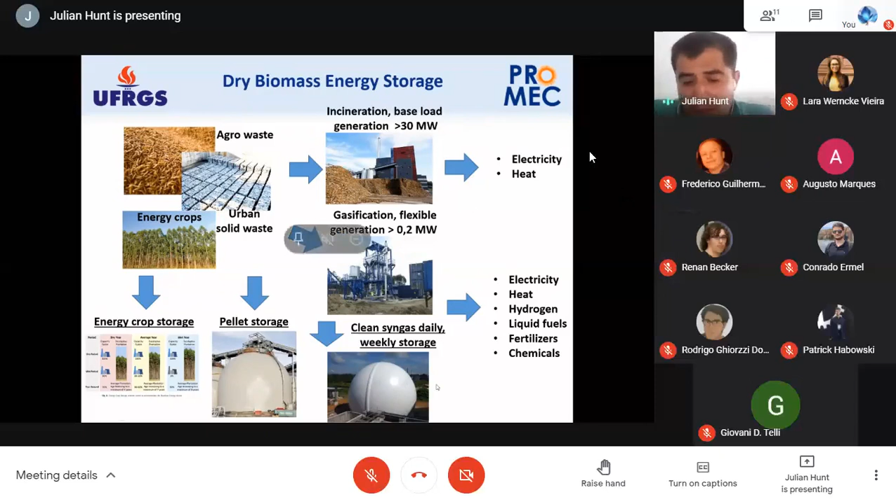and other chemicals. The other advantage of producing syngas is that you can store the syngas for daily and weekly storage, which you cannot do with a biomass plant. A biomass plant is usually a base load solution, so it generates electricity throughout the whole day, throughout a whole month. But with gasification, you transform the biomass into syngas, and then you can store the syngas similarly to biogas or natural gas, and use it for peak generation during moments in the day when electricity is more expensive.

So looking into the resources, when you're extracting and producing wood, for example from a eucalyptus plantation, you have the option to use this resource for wood production for civil construction. You can use the wood for cellulose, for the paper industry. You can use the wood for a biorefinery, which has been developing mainly in Europe. And you can also use the wood from these forest plantations for biofuels.

Mainly the low-grade wood, which is small, irregular, which doesn't have the qualities for sawmills or for paper production or biorefinery, is used for fuel. This mainly happens in the US. In Brazil, it changes because of the location, the distance from a paper industry. Maybe it's too far from the industry, so all the wood goes for incineration. But this would be the ideal way to manage an energy crop. From the same energy crop, you have several products from the wood.

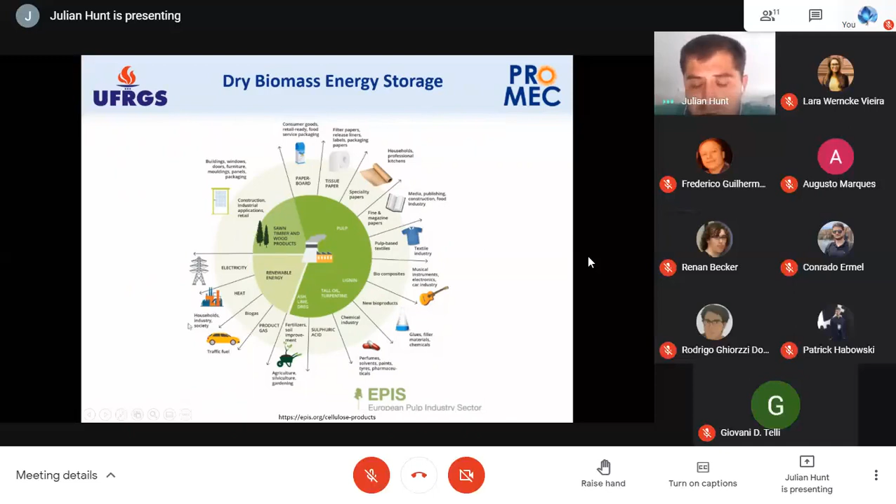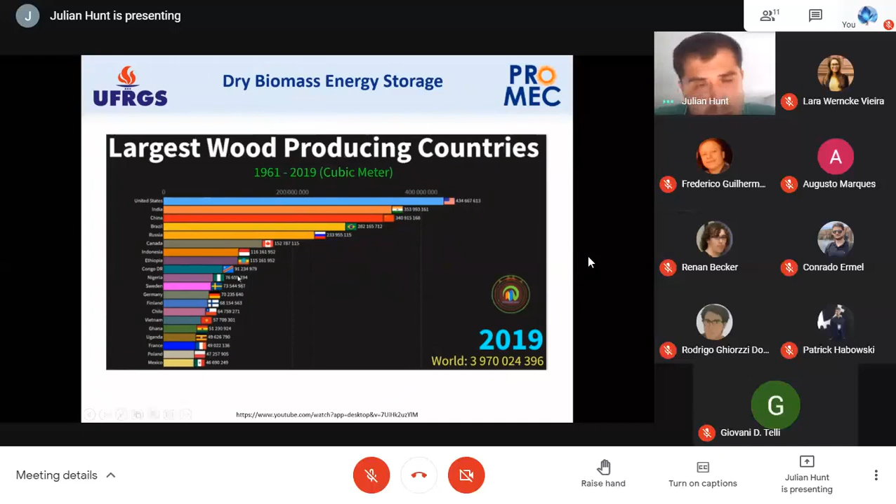In the US, they have around 40% for paper production, another 40% for construction industry, and then 15 to 10% is used for fuel and other industries. The US is the country with the highest wood production, followed by India, China, and then Brazil, Russia, Canada, according to the FAO. FAO is a food regulator. It's an agency from the UN that regulates food products.

In Brazil, we had the production of wood increasing significantly from around 2011 to 2018, for example, mainly due to the increase in exportation and civil construction. But then you have a large decline, and it's a very volatile industry. So the more products you can have from this dry biomass, the better, and one of them is electricity generation.

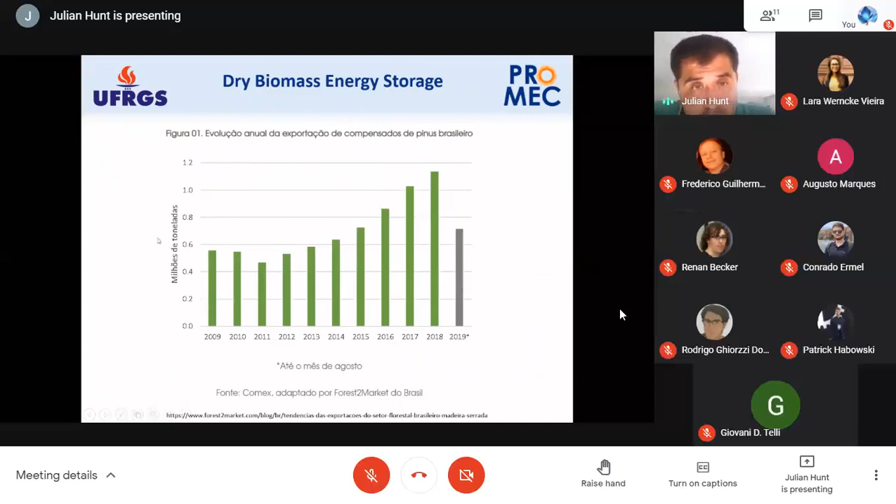So this is the exportation of wood from Brazil, Pinus. The main states for production and exportation of this wood are Santa Catarina, Paraná, then Rio Grande do Sul. And the countries are the US, Mexico, China.

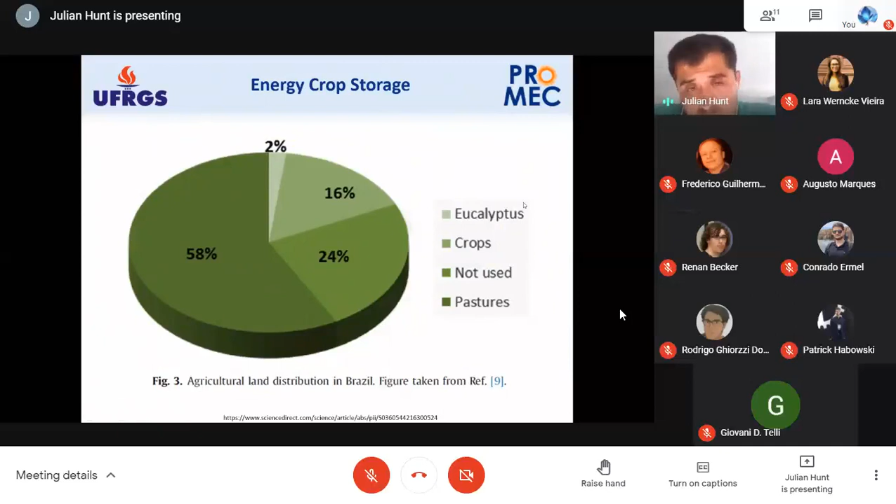And looking at the whole arable land in Brazil, eucalyptus takes around 2% of the land, pasture 58%, crops 16%, and 24% of the arable land is not used so far in Brazil. So there is a lot of land available, for example, to produce biomass for electricity generation, not only for all the other markets that we had talked about.

And this energy crop storage solution, which I propose, is very focused on the Brazilian case, which varies with the amount of hydropower generation that is available in Brazil. For example, in a very wet year, you have a lot of hydropower generation and the cost of electricity reduces, so you don't need so much thermoelectric generation from natural gas, from biomass, from coal.

One alternative would be not to use the biomass that you have available for electricity generation. You would allow it to grow instead of cutting and using it. And then when you have one, two, three, or several dry years, you would increase the amount of biomass consumed, so the average age of your biomass plantation will reduce.

So in a dry year, you have, for example, a 90% capacity factor for your biomass plant. In a wet year, you only use 50%, mainly in the dry season or when the price of electricity is higher, and you allow your biomass energy crop to grow. So this energy crop management alternative is appropriate for Brazil because of this variation in costs throughout the year.

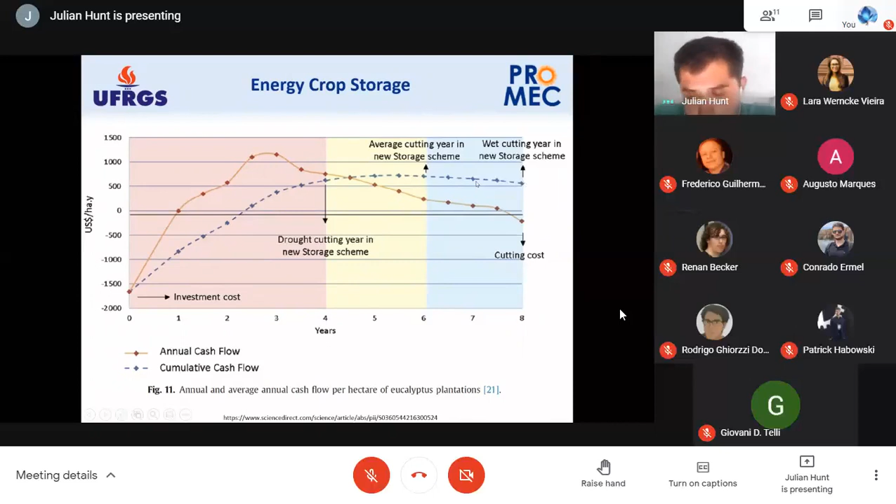And another particular issue for biomass plantations is that the biomass, the eucalyptus, the pinus, has to be planted within around a 50 kilometer radius for you to make incineration, a power plant, viable. For example, with around 20 to 40 megawatts.

You need the area surrounding the plant, at least 2 to 5%, to be biomass plantations in order to make it viable. So below this, you would think about using gasification as a solution. I'm going to talk about gasification in the next slide, not further on.

So another option, which is very used, particularly in the US, in China, in India, in Europe, is the production of wood pellets, and it's also easier for storage. The production of wood pellets, particularly in Brazil, would be interesting because storing wood is very complicated, because the wood degrades and you have a high concentration of humidity. Whenever you want to burn it, you can use it. And it's a challenge because it's going to putrefy.

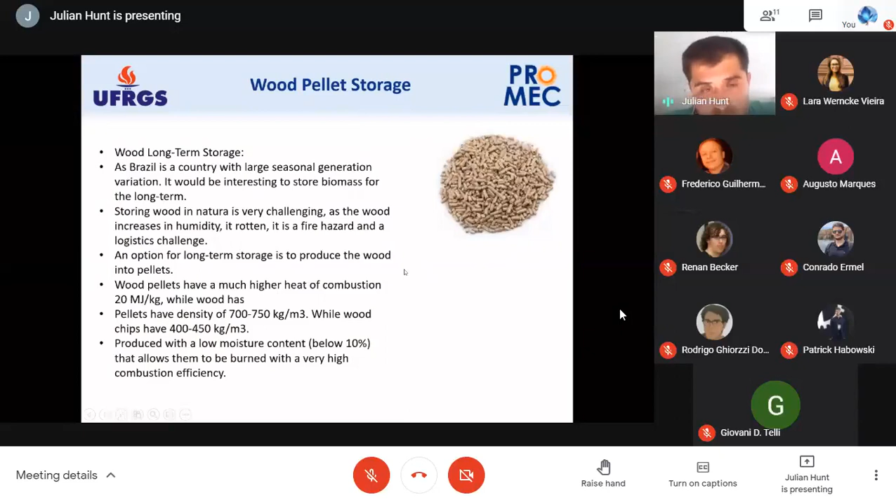It's also used because in Europe, in the US, there are a lot of people that use these wood pellets for heating in their houses, for heating up water, for taking showers and washing. This is also a good approach for decentralized energy supply for heating in countries. It could be used also in Brazil for process heating, for industrial heating, and have several benefits compared with wood chips, which are usually used in Brazil.

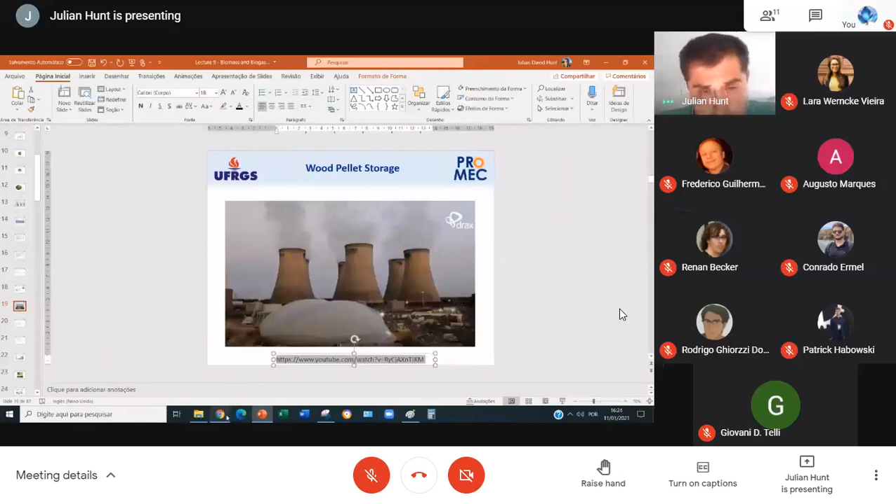So there is one power plant in the UK, which is Drax, which has 2 gigawatts of installed capacity. And I would like you guys to watch this video, and they're gonna show how Drax managed to turn itself into a biomass power plant. So Drax used to be a coal-fired power plant, but the UK and Europe have decided to abolish coal power plants. So they had to make a new design, and this is the solution that they found, and it's a very good solution. And Brazil would also have a huge potential for this technology.

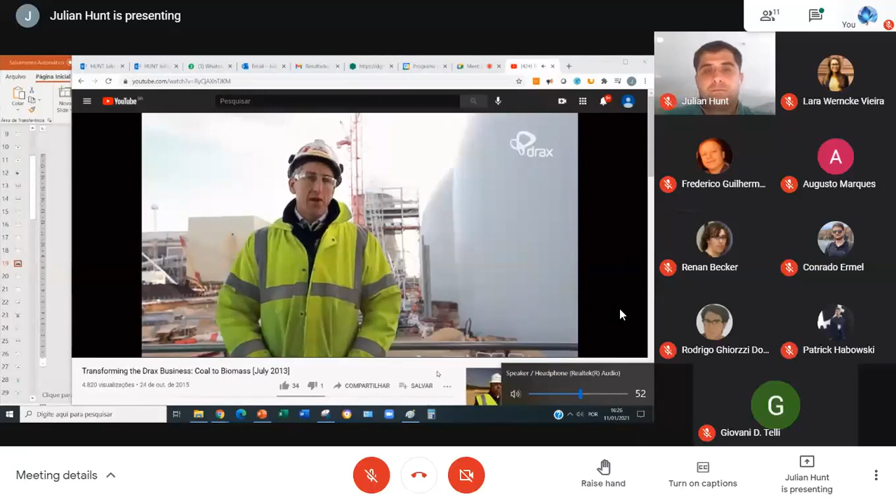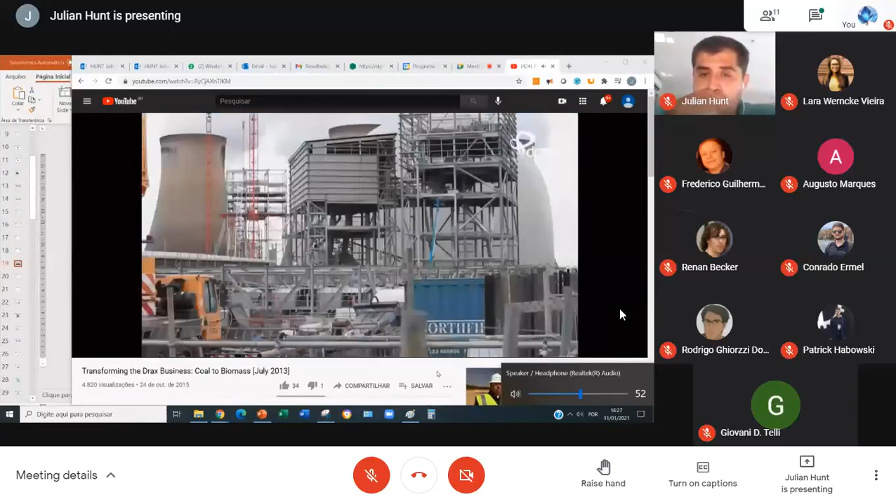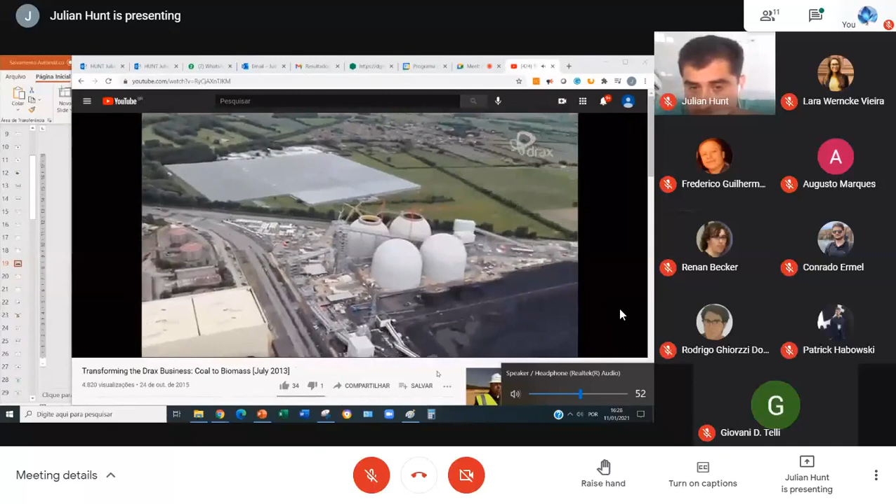Please, can you please put this video on? Thank you. Did you guys finish the video?

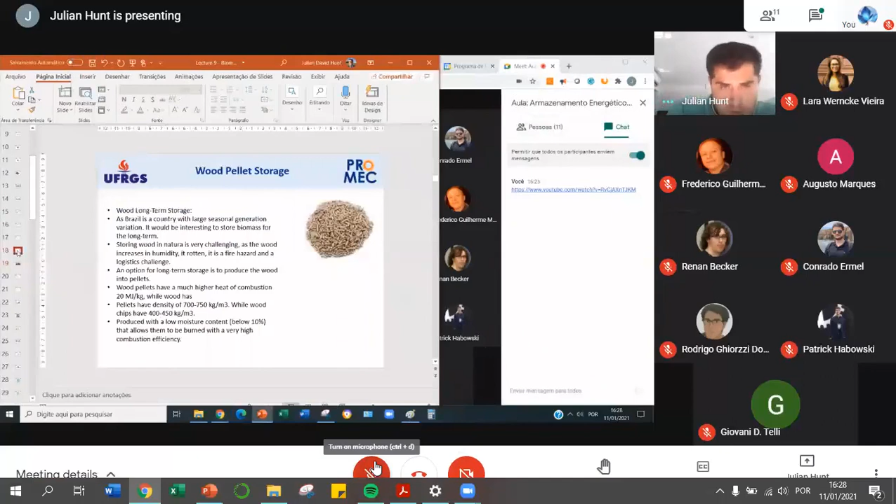Right. So this is the top innovative solution for storage of pellets. Pellets are convenient because they're not like water that increases the pressure on the bottom. Storing these pellets is a huge challenge, of course, but with these domes, the structure, the weight distributes itself, which allows storing in very high, 30, 40 meter domes like this. And they're inflatable, after which the structure is strengthened in order to cope with the weight. But it's a very good approach for storage.

For example, I don't have the picture here, but if you look at the coal storage sites that you need, it's huge, and has a huge fire hazard. It produces a lot of particles around the coal power plants, which is not so great. So having such a solution for biomass would also release a lot of dust in the air. The humidity would increase. You wouldn't be able to use the biomass, the pellets, if it rains, for example, because the amount of water in the pellets would increase, and then the efficiency of the boilers would substantially reduce. This is a very interesting solution.

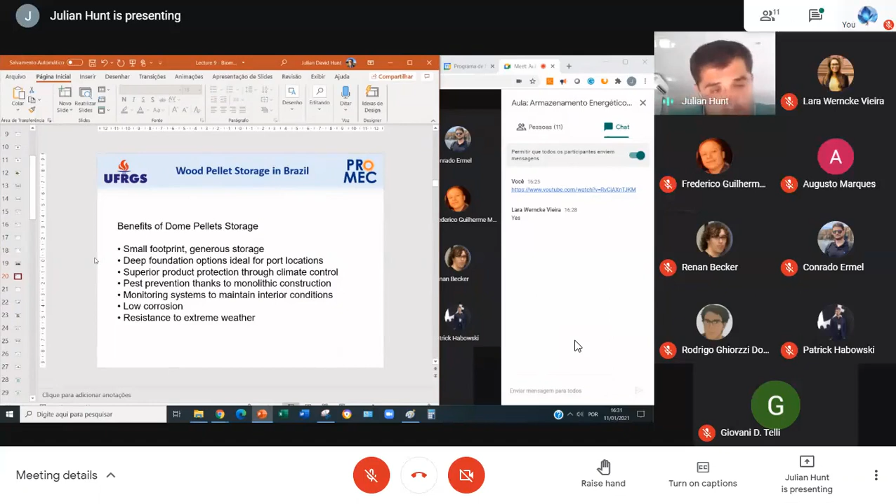And I was looking into comparing how much these domes store. One of these domes stores 90,000 tons of pellets; assuming calorific values of 20 megajoules per kilogram, you would have around 200 gigawatt hours for one of these domes. 200 gigawatt hours is equivalent to 8 gigawatt days, 0.35 gigawatt months. So for example, one of these domes would supply the amount of energy equivalent to a biomass plant of 350 megawatts, which is a reasonable size. It's a large biomass plant.

The one that we watched in the video is 2 gigawatts, but it used to be a coal power plant. They wanted to turn it into a biomass-fired power plant. They built all this infrastructure to import the wood from the US, for example from Texas to Florida. They have several pellet production plants. It is a huge project. It's a lot of wood, and they bring it all from the US and they make it viable. So I'm sure that Brazil can work it out and produce one of these biomass plantations, which won't require bringing it from very far, and it is one alternative for Brazil.

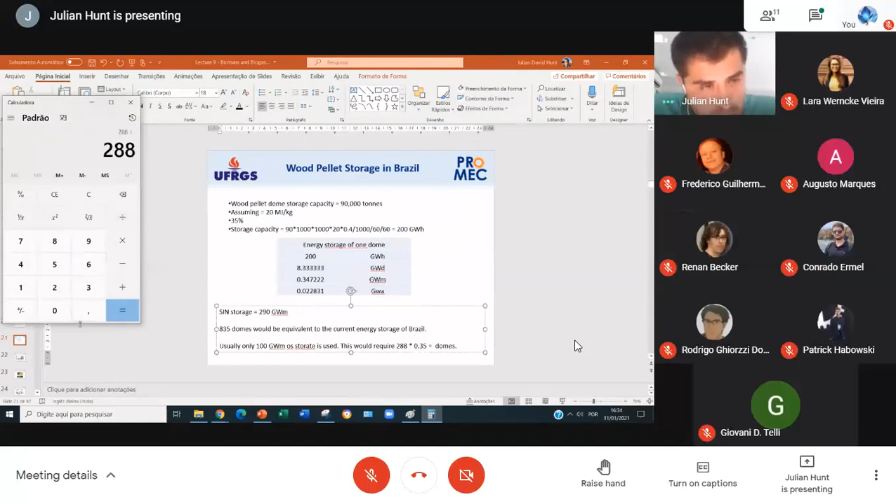Julian? Hello? I have a question. In the case of the England coal power plant, if you have local coal, is it environmentally viable to bring pellets from another continent?

Yeah, usually when you're carrying wood, in order to make it viable, it has to be brought from 50 to 300 kilometers away, because the fuel that you spend carrying the biomass increases the cost a lot. So their solution, they have these pellet plants built close to port facilities, with storage sites in the port facilities, and they try to reduce as much as possible the land transportation.

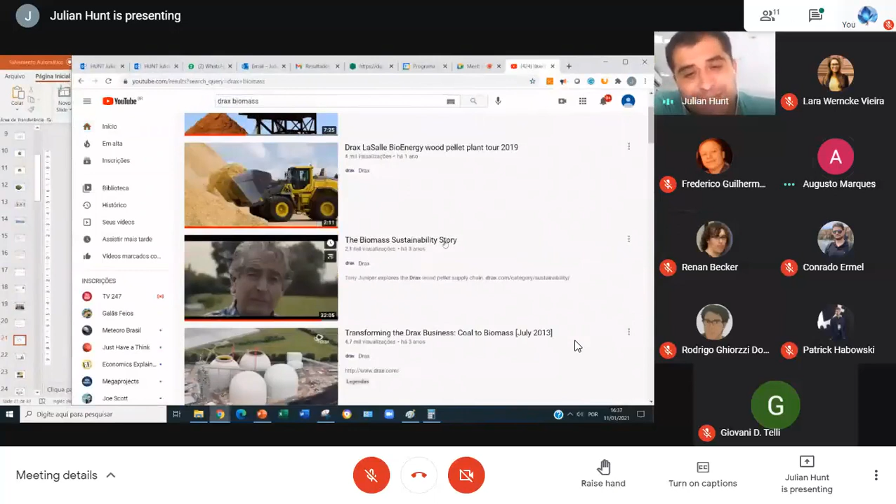There is a video on the sustainability of this solution, which is very interesting. It's half an hour, so I wouldn't want you guys to watch it now because it's a long time. It tries to argue that it's a sustainable solution. I don't really buy it, but they have their arguments in this video. Very good video. You can watch it later.

But it's debatable, of course, because if the ship is propelled with hydrogen, and the hydrogen is produced from renewable energy sources, green hydrogen, then you wouldn't have any CO2 emissions involved. Maybe on the production of the components of the ship and other indirect emissions, but then the sustainability factor would definitely increase,

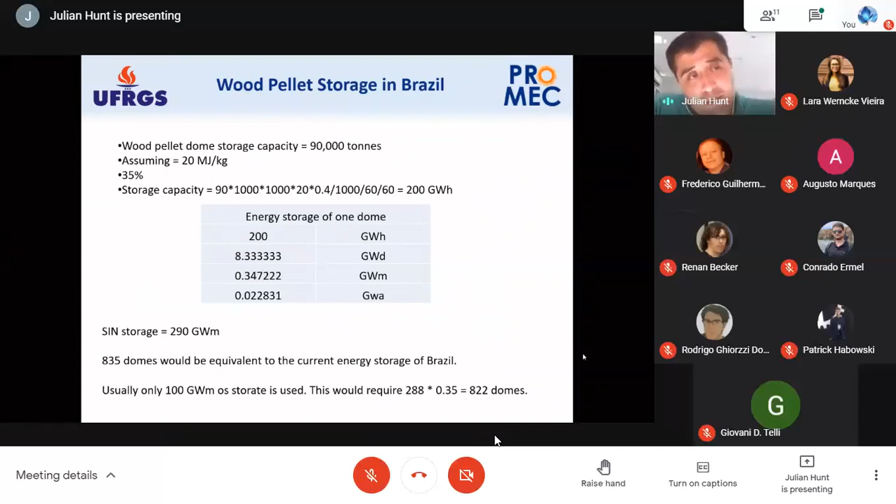but it's still debatable to burn biomass from the US in the UK and argue its sustainability. So it's a very debatable topic. Very good question. In Brazil, it would be much more sustainable if you produce the biomass in Brazil and use it in Brazil. So it's an option that we could consider. Thanks for the question.

Right, so pellets from sugarcane bagasse. There is a possibility, and people are selling this and testing to see if it works. With bagasse, they have to dry the biomass first, then they shred it, and then they pressurize it at high temperatures, and then they produce these pellets. The energy consumption for this process is usually 10%, 15% of the energy within the biomass.

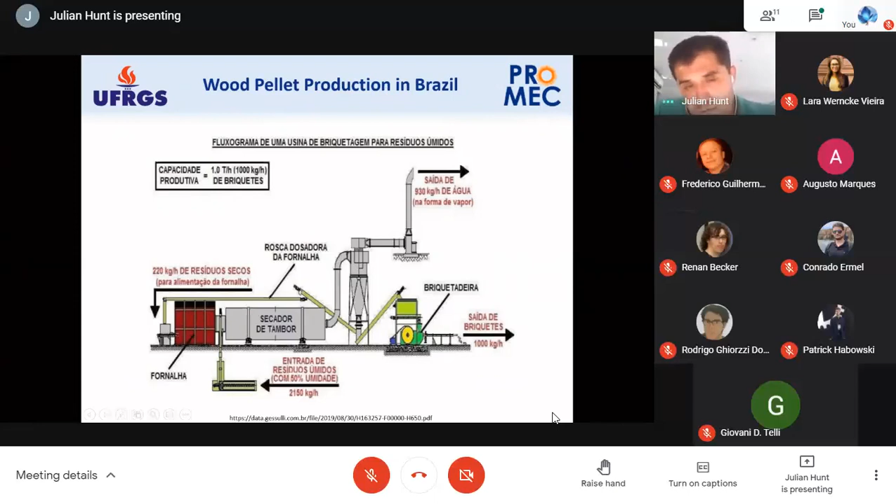So it's a relatively high energy consumption process, but once you have the pellets and you want to generate electricity, the efficiency might increase from 25% to 40% because of the increase in calorific value and the higher heat-to-volume ratio.

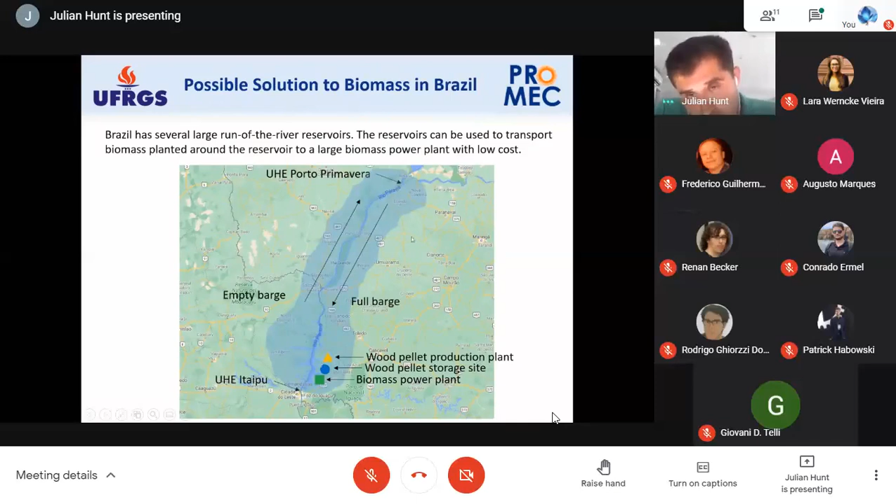So my proposal for a 2 gigawatt biomass plant in Brazil would be somewhere around the reservoir of Itaipu. Then you can bring the wood from upstream. This hydropower plant, Porto Primavera, has locks, so you can transport wood. And this one also, Ilha Solteira, has locks. You can bring the wood that's produced here all the way down using the flow of the river, and then go back. So that reduces the cost of transportation.

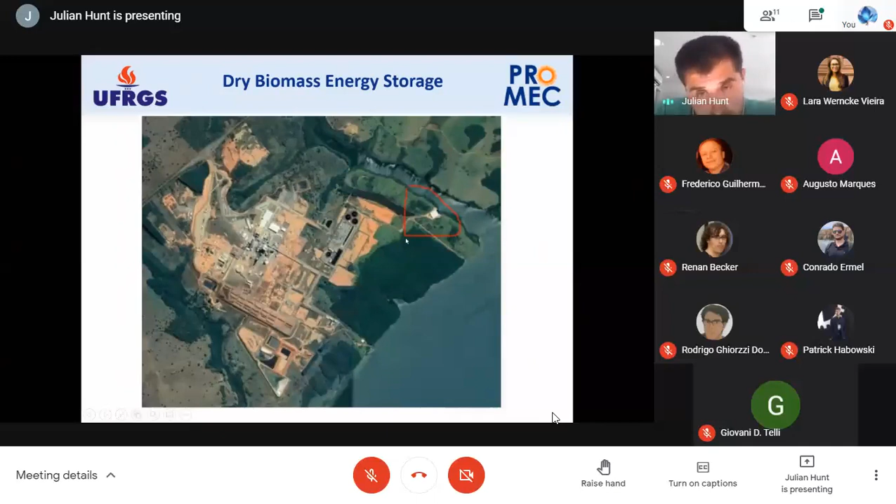So I was looking at the Eldorado plant in Três Lagoas. They have a port here. Look, this is the size of the truck. Look at the size of the ship. So they have two ports for ships in order to transport the wood. A very interesting strategy that can also be used. And I found out also that Eldorado has its own biomass power plant. It's a 50 megawatt power plant. It's called Onça Pintada. It was finished this year,

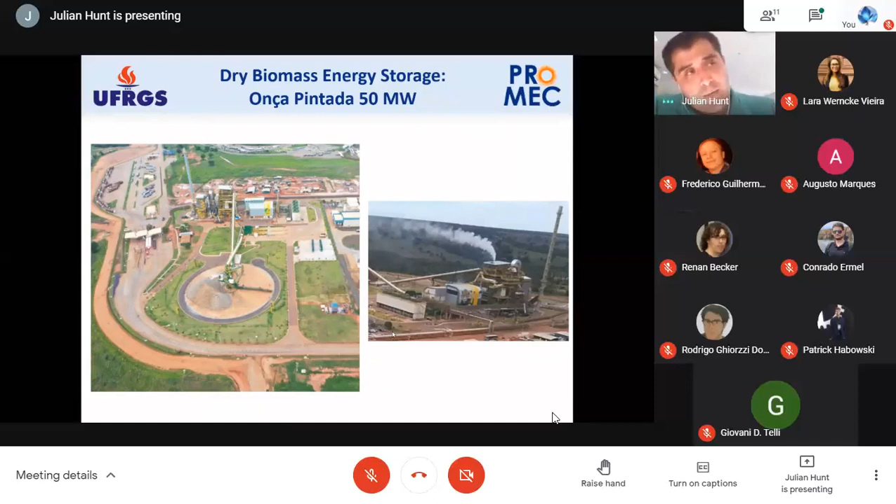and it uses eucalyptus. So if the price of paper increases, they reduce the amount of wood that they burn to produce electricity. If the price of paper drops, they burn more to produce electricity. Maybe the cost of electricity is very high, which makes it more sensible to import paper or reduce exports and use the wood for electricity generation. So biomass is very interesting for having several products. If all of them are cheap, or if electricity is very expensive, you burn the biomass and reduce the other products. Any questions about generation?

This is incineration. No questions, so let's go to biomass gasification. Let's watch another video, because it's much better to watch a video to explain how gasification works.

So gasification, you get biomass and you produce syngas, which is mainly carbon monoxide, 30 to 60% of carbon monoxide, which is CO. It's not CO2, it's CO, so it still has some calorific value, and 25 to 30% of hydrogen, which is great nowadays because everyone's talking about hydrogen. Wasn't great in the past, but now it's becoming very fashionable. Hydrogen. Shall we watch?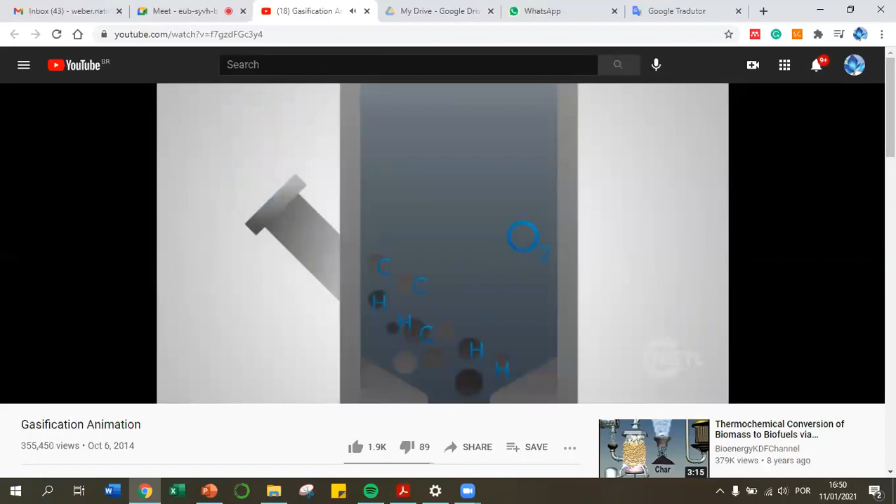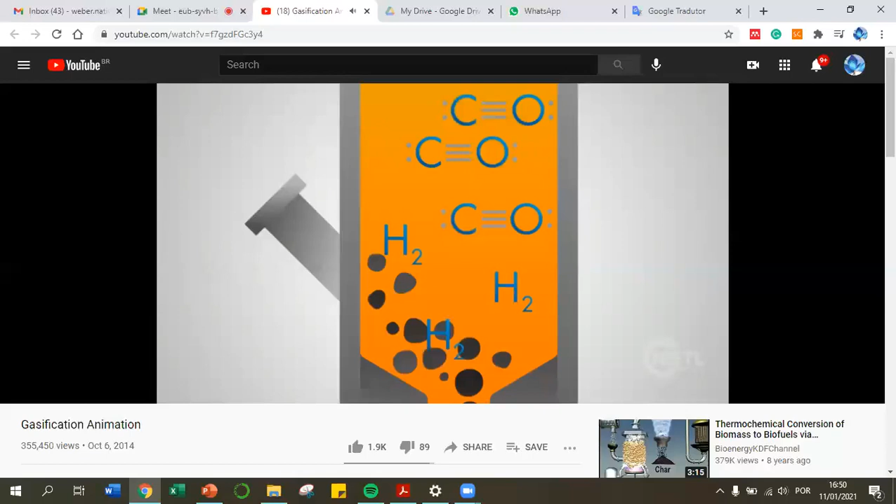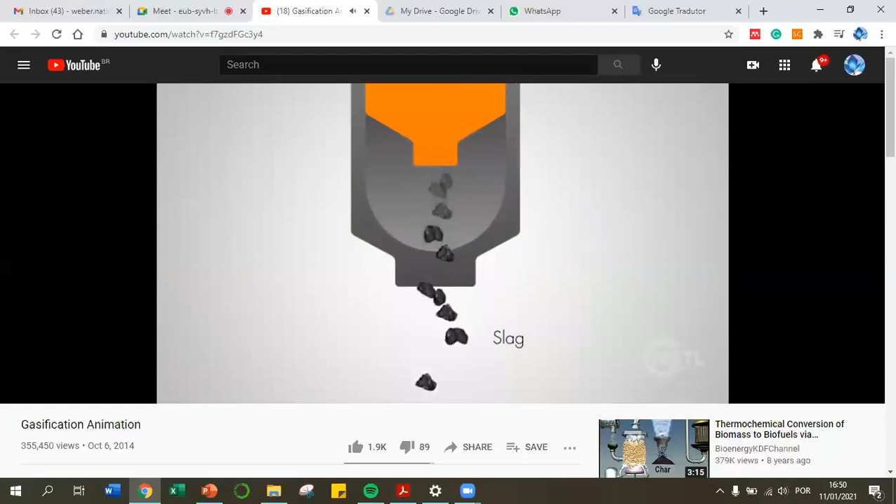Less air is provided than for combustion, and water is added as steam. Oxygen chemically reacts with the carbon in the coal to become carbon monoxide. The hydrogen atoms in coal become hydrogen gas molecules. The water also provides oxygen to chemically react with carbon, leaving hydrogen behind. These chemical reactions give off heat, but less than if the coal were completely burned. The product of gasification is syngas, which is primarily carbon monoxide and hydrogen molecules. The sulfur in coal becomes hydrogen sulfide, which is separated from the syngas and is used to make sulfuric acid, which is then sold. Due to the high temperature inside the gasifier, slag is made instead of ash. Slag is like small rocks, and contaminants remain safely trapped inside, so slag can be used to make roads.

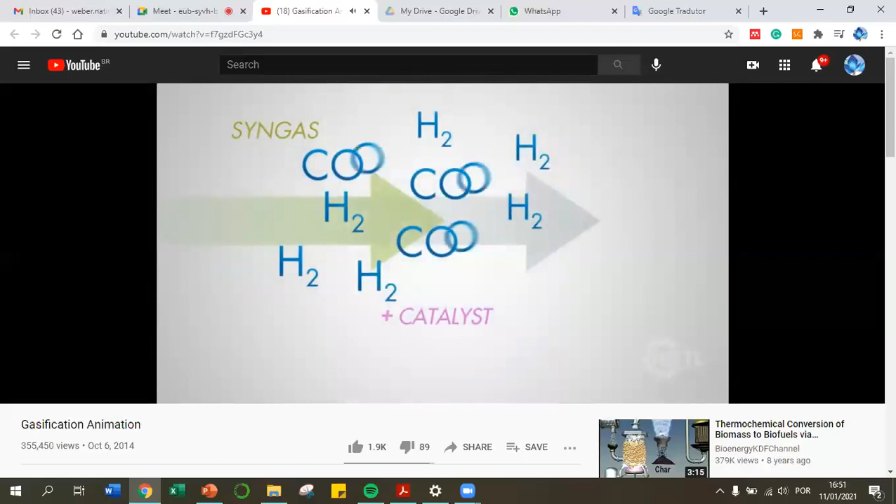Whereas gasification breaks coal down into small building blocks, other processes not covered here will reassemble these molecular building blocks, hydrogen and carbon monoxide, into all of these valuable products. To make clean energy from coal, we need hydrogen. To make more hydrogen, the water-gas shift reaction can be used to exchange each carbon monoxide molecule for a hydrogen molecule. When syngas is combined with steam and a catalyst, the water molecule gives off its oxygen atom to the carbon monoxide, turning carbon monoxide into carbon dioxide. Catalysts are used to increase the speed of chemical reactions. DOE's vision is to use hydrogen to generate electricity in a power plant with only water going up the stack.

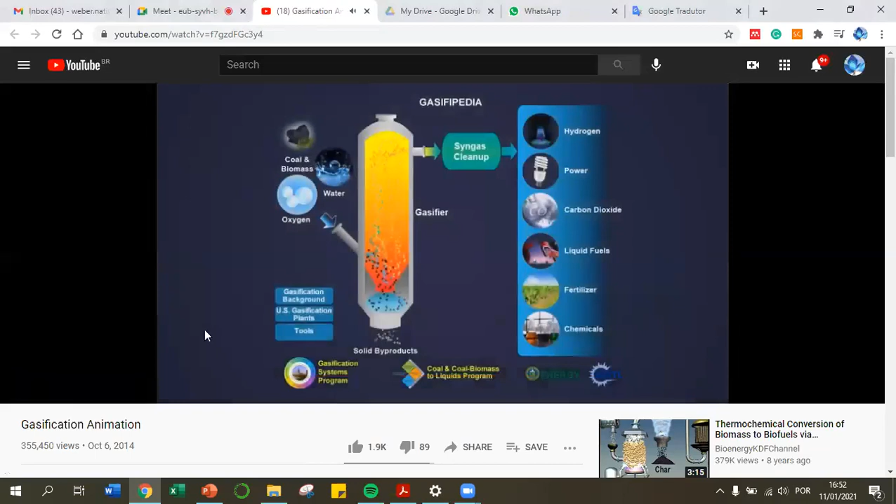Coal can indeed be used to make clean electricity. But gasification is not limited to coal. Wood, natural gas, oil, and farm waste can all be burned to make heat. They can also be gasified to make clean electricity, clothing, fuel for cars, trucks, tanks and jets, and other products we use every day. Clean coal gasification can be done today. DOE is developing technologies to make this vision affordable. To learn more about these technologies and gasification in general, enter Gasifipedia into your preferred search engine.

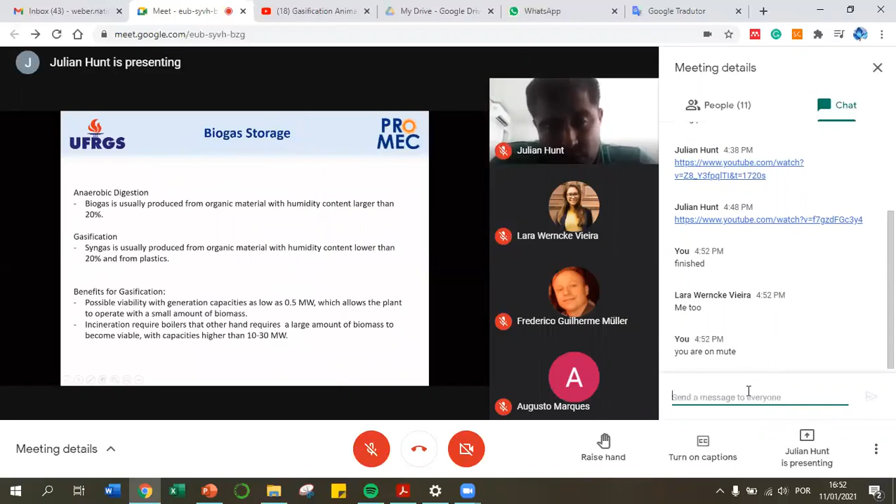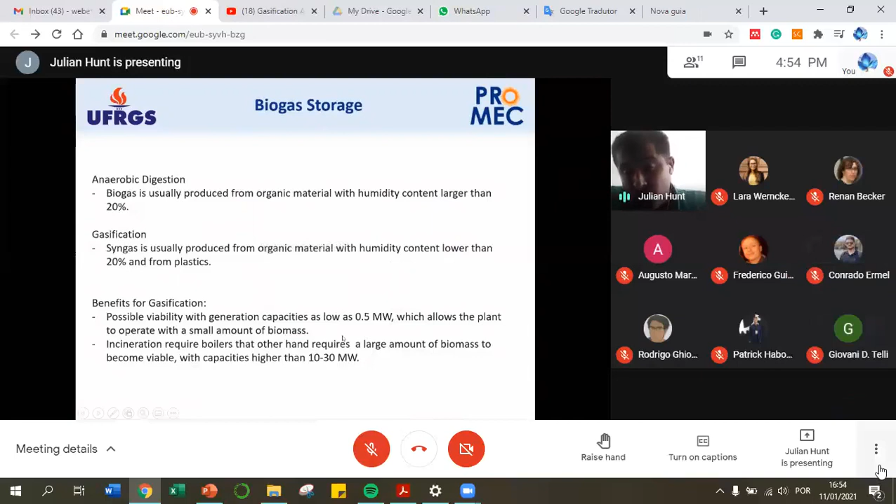So benefits of gasification: it can produce viably generation capacities as low as 0.5 megawatts, which allows a plant to operate with small amounts of biomass. So the main benefit nowadays is that you can generate electricity with very small amounts of biomass. Incineration, on the other hand, needs a very large boiler, very large plants, which need a large volume of biomass. So now the benefit is that it operates with small amounts of biomass. The other benefit, as I said, is producing hydrogen. Hydrogen is also going to be very important in the future.

One particularly interesting project you could publish or develop is that gasifiers are small and light, so you can put the equipment into a container. Instead of transporting biomass to the gasifier, you take the gasifier to the source, for example a rice husk plant. You would need a substation to sell electricity to the grid or use it in your plant, so it would be interesting to pair this infrastructure with a solar power plant, because the substation you already have gives you the electric system required to connect your biomass gasification plant to the grid. This is around 10-15% of the project cost.

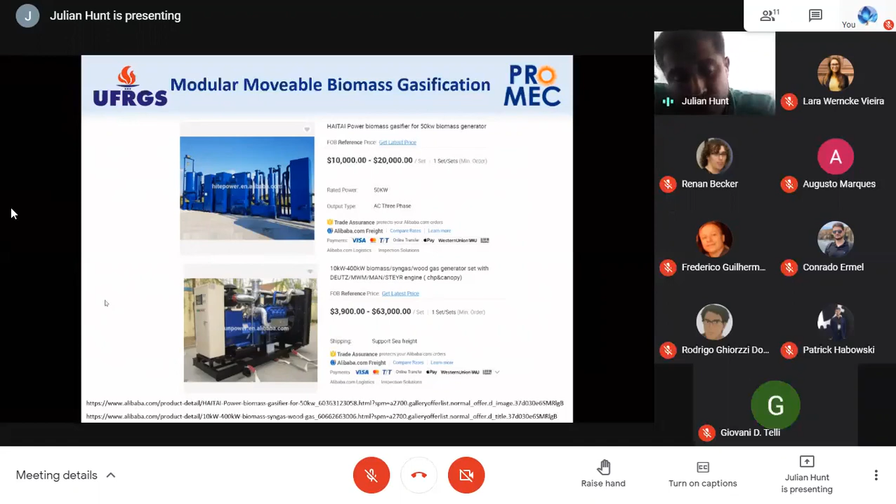So the idea is you put this in a container. For example, for one month you go to a plant that has stored rice husk or other waste material. You store it in a container, a storage facility, and consume all the biomass. When it's finished, when you don't have enough, you put the container back on a truck and take it to another location. This is an interesting strategy to make gasification viable with a low amount of production, a facility with very small production where you can store biomass and burn it whenever these gasifiers are available around.

A huge benefit of this type of solution, gasification, biogas, or any other solution treating urban waste, is that you prevent the production of methane from waste. If you leave waste in landfills, it biodegrades, and this biodegradation produces methane, which has a much higher capacity for increasing the temperature of the world. It's a much stronger greenhouse gas than CO2, about 20 times more potent.

Instead of having waste degrade, if you gasify it, produce biogas, or incinerate it, that saves a lot of CO2 and methane emissions. If you're clever enough, you can design a project that takes this into account and get more carbon credits out of it. Instead of reducing just CO2, you have a potential 20 times higher than CO2 for greenhouse emissions, making the project viable and earning a lot of money from the carbon mechanism, CDMs I believe it's called. There are a lot of people paying money for you to reduce CO2 and methane emissions.

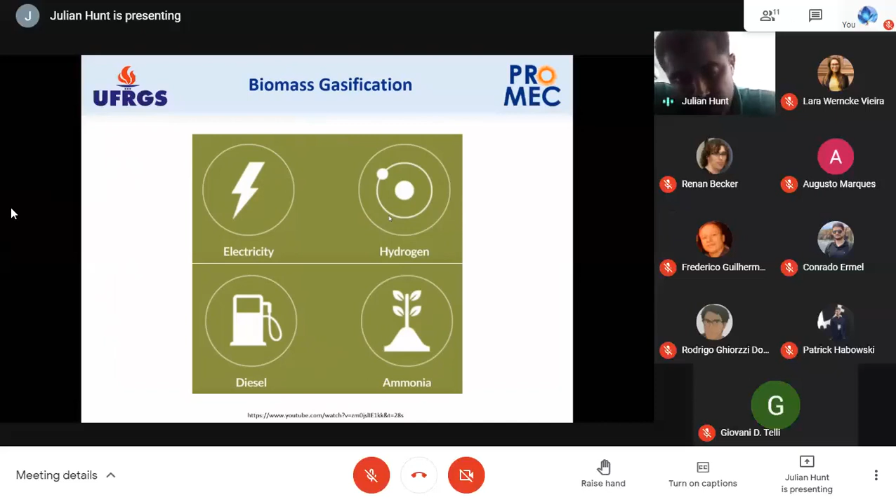As the video showed, you can produce electricity, hydrogen, diesel. You could also produce ammonia, for example, if you have difficulties transporting hydrogen. If you want to produce hydrogen and reduce dangerous carbon monoxide emissions, you have the water gas shift stage, which transforms carbon monoxide into hydrogen. If you only want to generate electricity, you can burn the carbon monoxide without converting it to hydrogen, which is much cheaper and more convenient. But if you want to produce only hydrogen, it's worth converting the carbon monoxide into hydrogen.

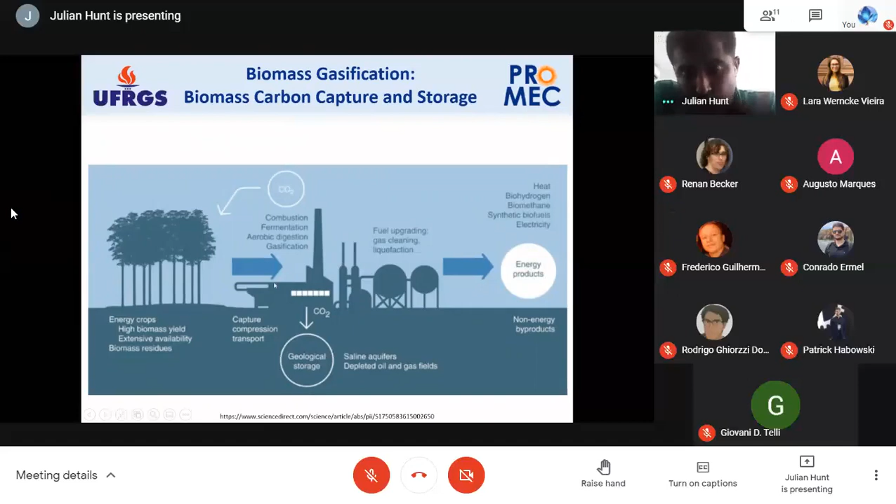As I mentioned, this is a very good approach for carbon capture and storage, because you end up with hydrogen and carbon dioxide, which have significantly different sizes and are easy to separate. Once separated, you can store the carbon dioxide in geological formations under the power plants or any other type of long-term carbon storage.

So now looking at wet biomass, we are one hour in. Any questions about dry biomass?

Hi, Professor, can you hear me?

Yeah, I've been reading during the vacation about town gas. It's very similar to syngas, which they had in England, only from coal. Because of the CO, they decided to prohibit it in England, because people used to commit suicide using it. For example, if you had this gas in your apartment, people used to commit suicide because of the CO. So I believe this gas will never be available for people, just for industries. Thanks, Frederico, for sharing your experience.

In Rio de Janeiro, we also had the gasômetro, which used to gasify coal to produce syngas, and people in Brazil used to use syngas for cooking fuel and boilers. And it's not only suicide - for example, if you forget your gas oven on at night and it's not firing, a kid goes and turns it on, he also kills everyone in the apartment. So it's very, very dangerous.

And in Europe, actually, even natural gas - they are banning it because houses in Europe are completely sealed. They have these double glazed windows that close. And if you forget the natural gas on, or forget the oven on with fire, it consumes all the oxygen in the building.

This actually happened with me and Paula. One day we were living in Vienna - thank God our windows were not extremely sealed - and we forgot the oven on. In the morning she tried to light a candle to pray, and the candle didn't fire well - the flame was very small because all the oxygen in the apartment was consumed. I woke up with a huge headache. I could have died also.

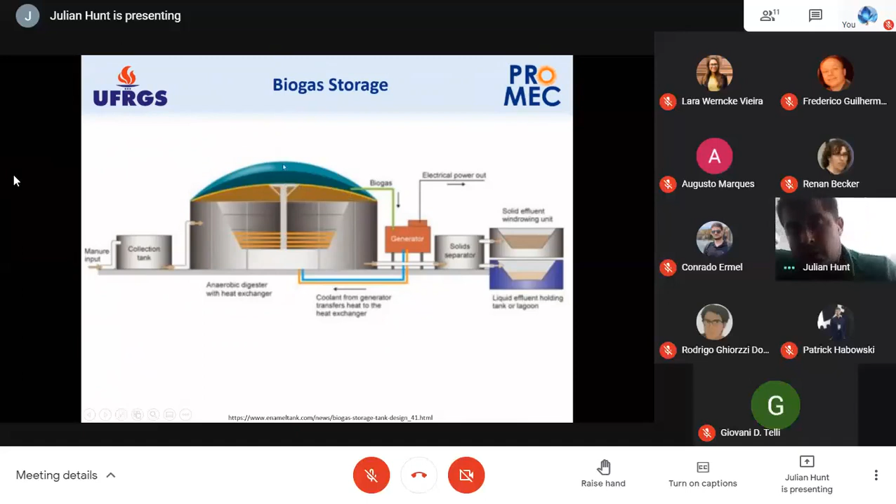This other section of the biodigester is a storage part. During the day, when it's warmer, solar radiation increases the temperature of the biodigester and you produce more biogas. The gas inside also increases in temperature, which increases volume, so this membrane varies, increasing and reducing. This top part is just air - outside air blown in with an air pump, which makes sure the pressure here is slightly, maybe 0.2 bar, higher than the pressure outside. The pressure here increases because biogas is produced and this inner membrane rises. This is how a biodigester works.

This is another example of a biodigester. This one has a stirring capacity, so you use energy to stir the organic compound flowing around here, which increases the production of biogas. You have different other stirring mechanisms - this is a valve, uma hélice, which turns the material in here to increase it.

In the same case, this is the lowest level - if the membrane lowers down and reaches here, the biodigester storage capacity is empty. When it rises, it's filling up. In the biodigester, it's important to have storage because in most cases you want a constant amount of biogas production. Sometimes you produce more, sometimes less, depending on temperature and the concentration of material in your bioreactor. If biogas production starts to lower, you can increase the temperature, or put in material with more calorific value, producing more biomass, and control the amount of biogas production.

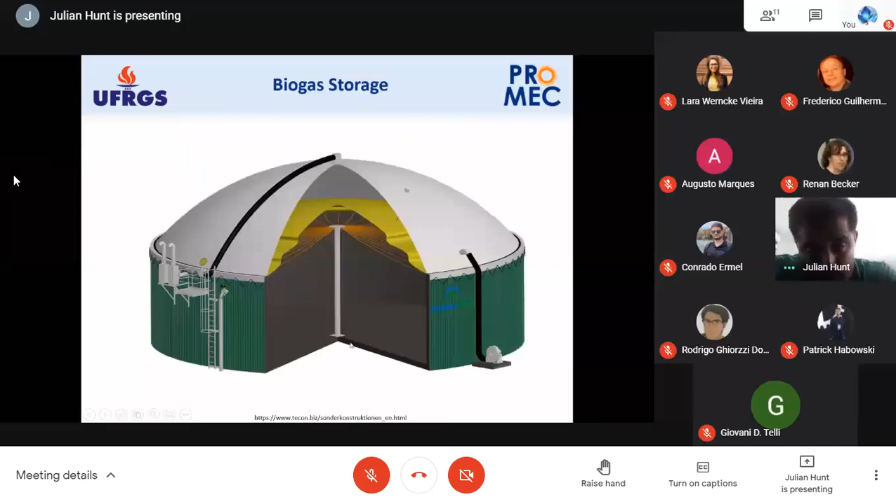Another benefit of this type of plant, particularly in Europe, is that the air in this membrane also contributes to reduce the heat losses. It's like an insulator, because the air inside here is sealed between the two membranes, the outside membrane and the inner membrane, and reduces the energy losses for the biogas reactor.

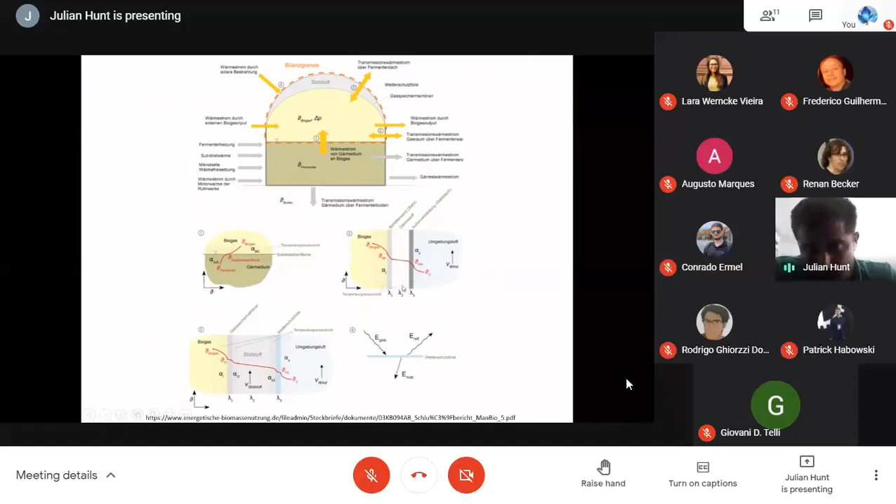I don't know how to read in German, but I can understand some of the concepts here.

Biogas storage. So after you produce in your bioreactor, you can have a facility that only stores the biogas. So it's not the bioreactor. You produce the biogas, you remove the hydrogen sulfide, then you store the biogas or the biomethane in one of these domes. It has a similar mechanism. So basically, you have an air pump that makes sure that the pressure of this membrane is always 0.2 bar higher than the atmosphere, so it's standing all there.

And this inner membrane, so this is the outside membrane, the inner membrane will vary according to the amount of biogas inside. And the pressure is pretty much the same as atmospheric pressure, maybe 0.1, 0.2 bar higher. So in order to store a lot of biogas, these domes have to be very large, huge. So when I talk about balloons transporting hydrogen, it starts to make sense because it's pretty much the same concept, but you leave the balloon to fly and collect it in another location.

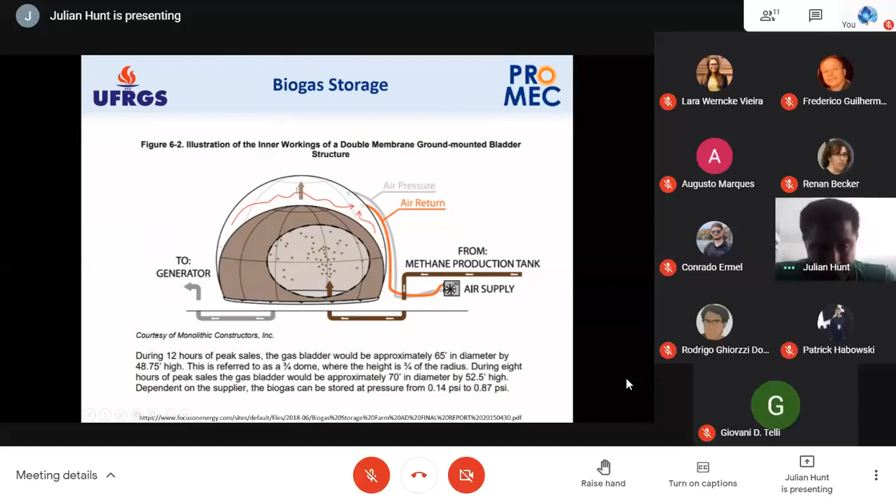So this is another representation. You have the air here, pressurizing this. When you increase the amount of methane, you have to remove the air from this section between the outside membrane and the inside membrane. The total volume is constant. So if you put gas in, you have to take air out. Biogas in this inner membrane, you have to take air out from between both. It's very straightforward, but very interesting though. So this is a kind of balloon material, very resistant and a cheap approach for biogas storage.

For example, if you have one plant that produces electricity constantly, 24 hours a day, you would need a 600 kilowatt generator. You might need a little bit of storage just to make sure that you always have biogas to produce as base load. But if you want to generate during peak hours, when the cost of electricity is higher, you will need more generation capacity because you will burn more gas in a shorter amount of time. And you also need to add storage. The amount of gas that you have to store increases.

This type of solution is good for daily or weekly energy storage, biogas for production of electricity, or for example, delivery of biomethane if you have a station that produces biomethane. So there are different options for storing biogas. You can store in this double membrane storage type, which I just talked to you about.

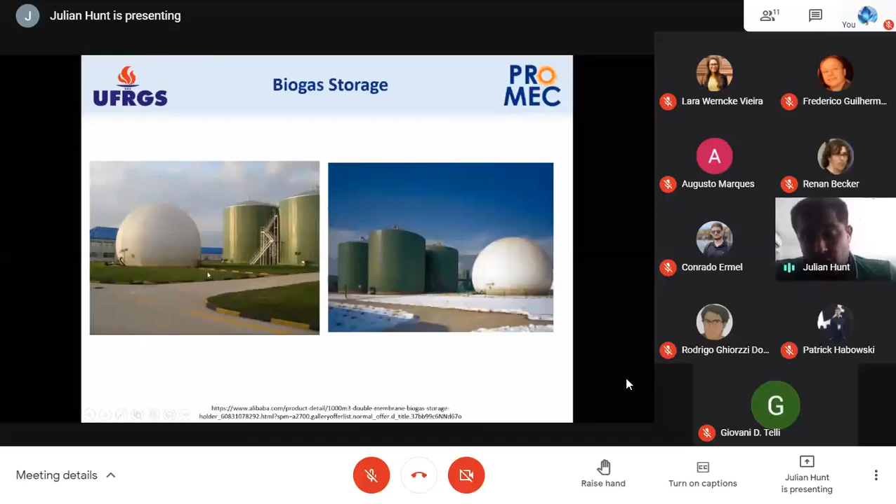So the pressure is much higher. You need much less volume, much less material to store the same amount of gas. But the advantage of the double membrane is that you don't need to increase the pressure of the gas. You can store it at low pressure, at ambient pressure.

So comparing the price for this energy storage solution, as I have been doing in all the lectures, you have two options: a small storage facility with 50 cubic meters, or the largest one available from Alibaba, which is 20,000 cubic meters. And the height goes up to 25 meters, very high. These are the materials that the outside and inside membranes are made of.

So the heat content of biogas is around 21 megajoules per meter cubic, which is equivalent to 5.8 kilowatt hours per meter cubic. And then if you multiply by the volume, you have the investment cost of $2.9 per kilowatt hour storage. Compared with batteries, it is $200 per kilowatt hour. So it's around 70 times cheaper to store biogas than store electricity in batteries.

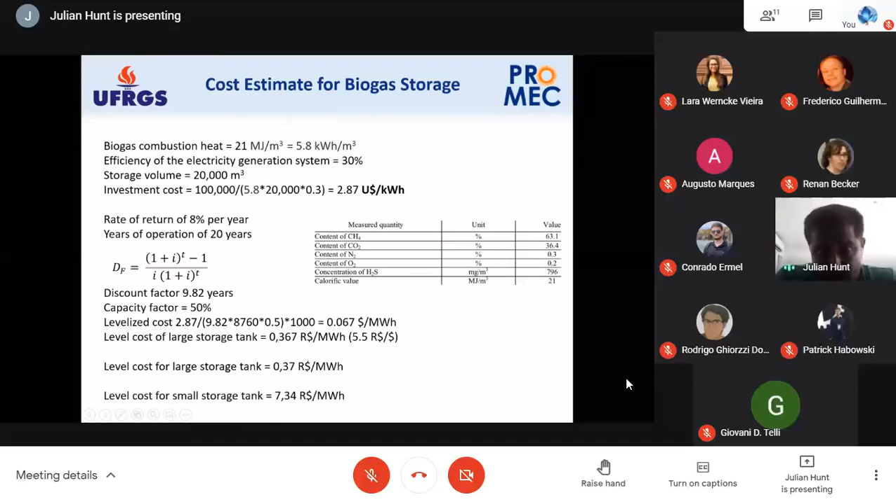So as I mentioned, you can also store gas in high pressure tanks. These pressure tanks can go up to 250 bar. I gave you the example for the power plant in Cuiabá, that's 80 bar. So for example, you have one of these tanks which can store 150 bar, but you only use 80 bar, so you're not using all the potential of these storage tanks. But anyway, the cost is very cheap because you need an 80 times smaller volume to store the same amount of gas because it's pressurized.

And then the cost is much lower than the cost of biogas storage: 0.3 versus 0.02 for high pressure. So it's more than 10 times cheaper to store high pressure gas than low pressure biogas. This is why it makes sense that the US has several of these high pressure natural gas tanks for seasonal storage. You're not storing gas for a day, you're storing gas for 365 days. It has to be 365 times cheaper than storing electricity for one day.

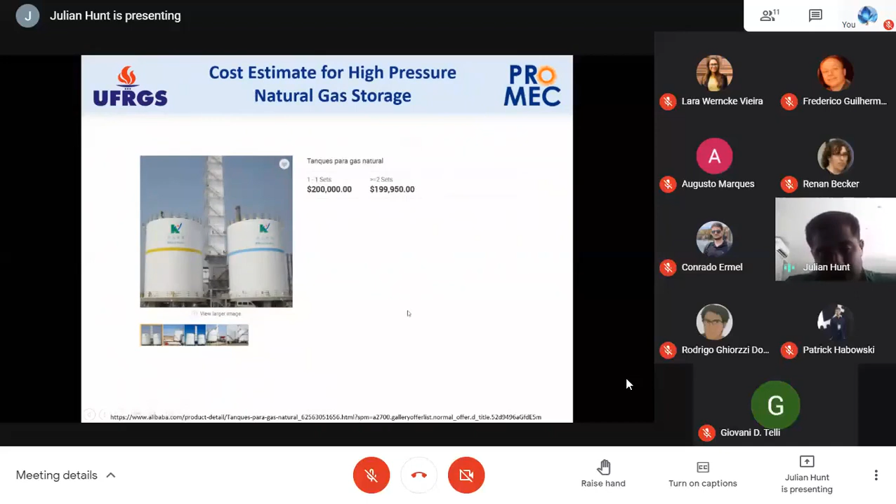So you have a lot of these natural gas storage tanks around China. Even in ports in Brazil, where you have regasification plants, you have natural gas storage tanks. And they are very cheap. Any questions about wet biomass? We have half an hour.

Okay, so we're going to talk about the ethanol energy storage opportunity. Ethanol is mainly made from sugarcane in Brazil. You can store sugarcane bagasse in pellets. As I mentioned, you can produce pellets from sugarcane and store them in these domes for biomass generation. The sugarcane is used to produce sugar or ethanol in sugar refineries. The sugar you can store in tanks for 2 or 3 years, depending on the quality of the storage tanks. And the ethanol you can also store in tanks.

So depending on the demand, you will always be able to make the highest returns in your refinery if you can store sugar and ethanol. Because if the sugar price increases, you sell more sugar; if the ethanol price increases, you sell more ethanol, which is very convenient for the industry. In the most advanced ethanol production nowadays, you take the sugarcane, you squeeze out the saccharose, and then you put it into fermenters and ferment it. It's not anaerobic digestion, it's aerobic digestion.

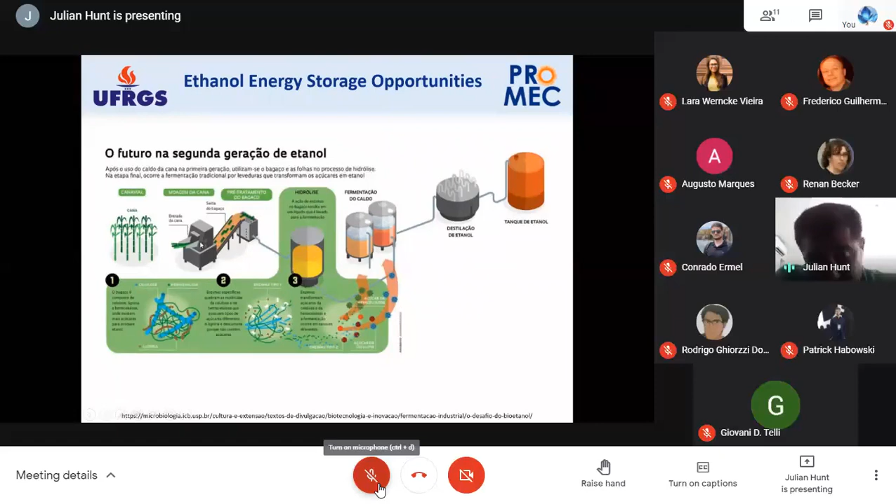You have this stage of hydrolysis in which you manage to break the cellulose and produce smaller parts, in which you degrade the cellulose, and eventually it becomes saccharose, sugar. And you also can produce ethanol with the sugar, the bagasse of the cana. This is the second generation product.

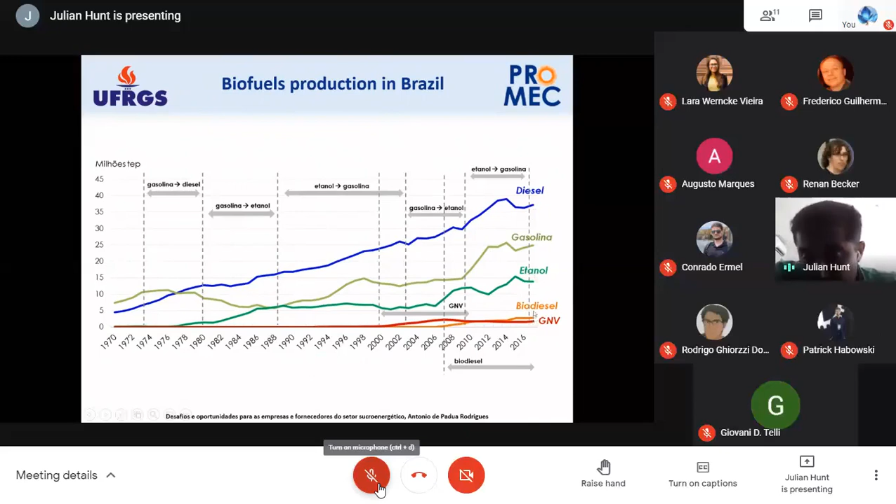So looking into fuels in Brazil, diesel is the main fuel used, then gasoline, ethanol, biodiesel, and a little bit of GNV. And these values vary substantially, for example, with crisis, with oil prices increasing, oil prices reducing, particularly with ethanol production, and you also have the biodiesel increasing. Now biodiesel is something around 5 to 10% of the production of diesel in the country, and it's increasing exponentially. It's very interesting. We're going to talk about biodiesel.

So one huge benefit of ethanol production from sugarcane is that you can also produce sugar. If the cost of sugar increases, you reduce production of ethanol, produce more sugar. If oil costs increase, you reduce the production of sugar. You can import sugar from other countries and use it for production of ethanol and reduce the cost of transportation in Brazil. And this is more or less in Brazil how the cost of ethanol and sugar varies.

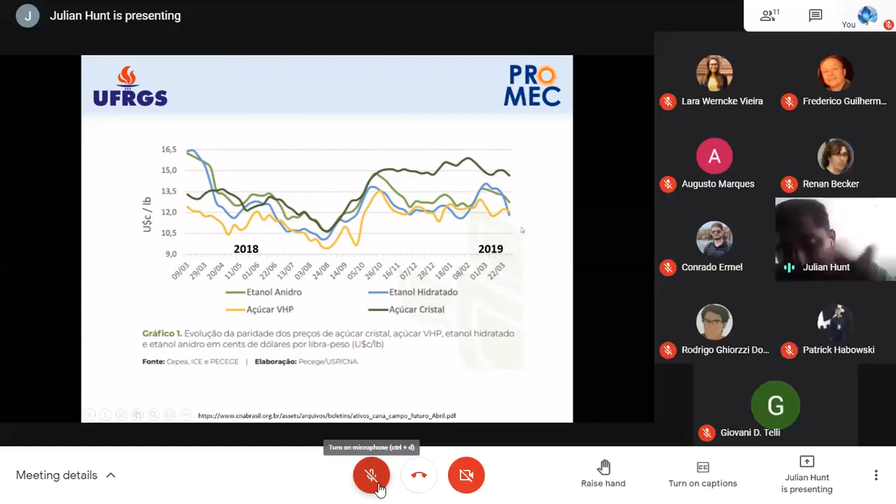Sometimes they follow the same pattern. Sometimes the sugar price increases. So, for example, in 2019, the sugar price increased compared with ethanol. Here, it doesn't have COVID prices, but in COVID, the sugar prices rose significantly and ethanol prices reduced. So nowadays, these refineries are producing much more sugar than ethanol.

Regarding biodiesel, in Brazil it is mainly produced with soy plantations. Soybeans can be stored seasonally and pluriannually in storage tanks, which is very convenient for these fluctuations of prices in fuel, having soy as a source of biofuels due to this storage potential. Then the soybeans go into diesel production, which I'm going to talk about in more detail.

And then the diesel can be stored in tanks, similarly to ethanol, similar to natural gas tanks. And it's relatively cheap, and you can store it seasonally and in pluriannual storage. And diesel is mainly used for transportation. It's also used for electricity generation during peak hours in diesel generators.

Right, so the soybean goes to oil industry plants. So first you need to extract the oil from the seeds, for which you have several processes. You can do it thermally, you can do it chemically, you can do it mechanically, different processes in order to extract the oils.

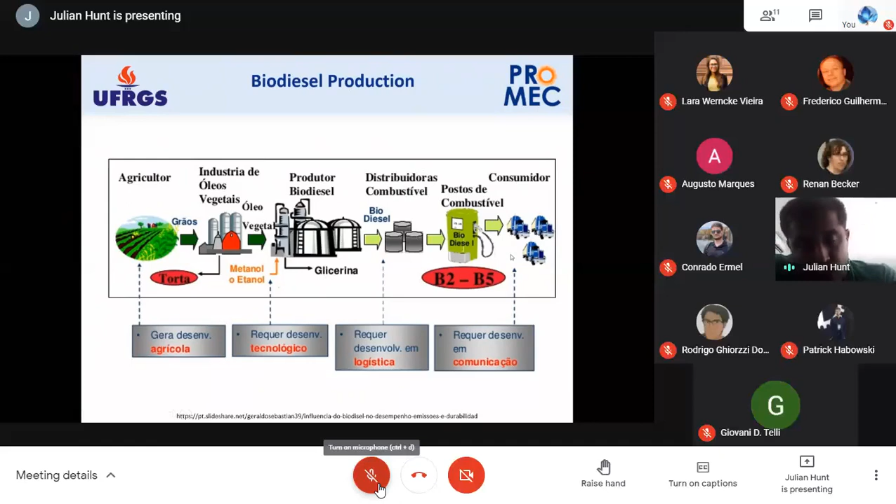So the main reaction that happens in a biodiesel refinery: the vegetable oil has glycerin, so it's a transesterification reaction. So the idea is to turn these lipids, these fats, into lines of hydrocarbon lines.

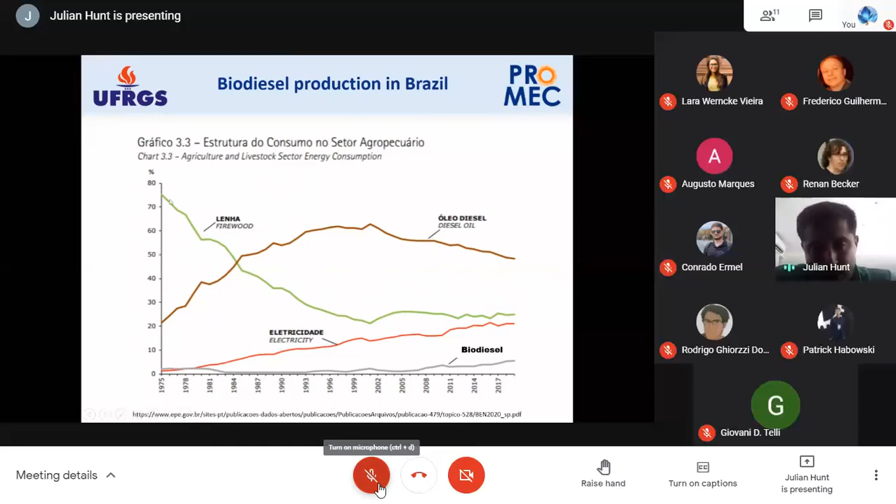So biodiesel is mostly used in the agro sector, mainly because the agro sector is producing it, and then it uses the biodiesel that it produces in its own production. It lowers the cost, it doesn't need to pay for gas, it's close to the production sites and has other benefits. The owner of the plantation probably has a stake in the biomass refinery.

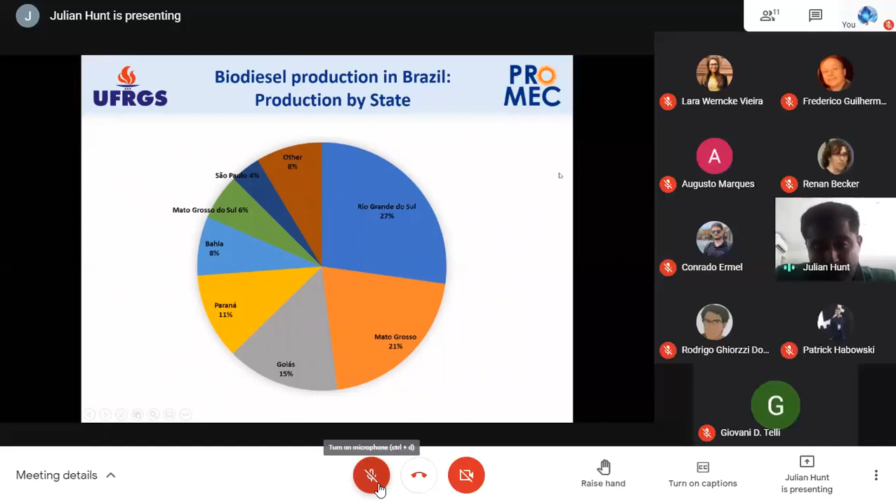So I had a look into biodiesel production in Brazil. You have a slightly seasonal production, mainly because of the soybean harvest. The main producer of biodiesel in Brazil is the state of Rio Grande do Sul, with 27%, then Mato Grosso, Goiás, Paraná, Bahia, Mato Grosso do Sul, São Paulo. So, we're in the Federal University of Rio Grande do Sul, so it's a great business there.

80% of biodiesel is produced with soybeans. 15% is with cow manure and blood, and cow fat. Mainly by JBS in Mato Grosso and Lins in São Paulo. They have 2 huge biodiesel power plants, and they're building one in Santa Catarina. I forgot the name of the city, but it's going to be bigger than the other 2 combined.

Marfrig also produces biodiesel, so other companies also produce biodiesel from animal waste, organic waste. So soybeans are mostly used as feed for pigs, chickens and cows. 20% is to produce oil, mainly for food production, but also for biodiesel. So 25% of the oil produced from soybeans is for biodiesel and other industrial materials.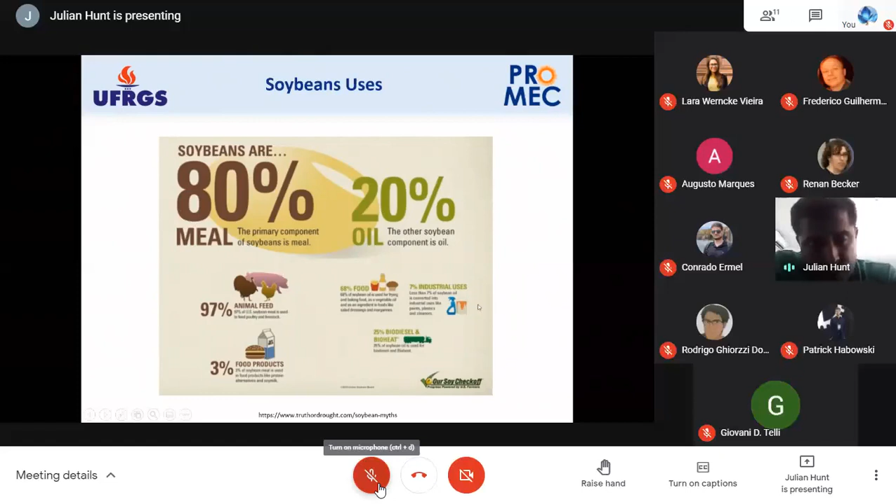Brazil is the one producing the most soybeans in the world. It passed the US in 2018, and is expected to considerably increase production, much more than the US. In Brazil, soy production mostly goes to China to feed its meat consumption. So biodiesel is a great alternative, because we have one market, which is to feed animals, and having biodiesel as another alternative to diversify the business of soy plantation. It's a great opportunity for Brazil.

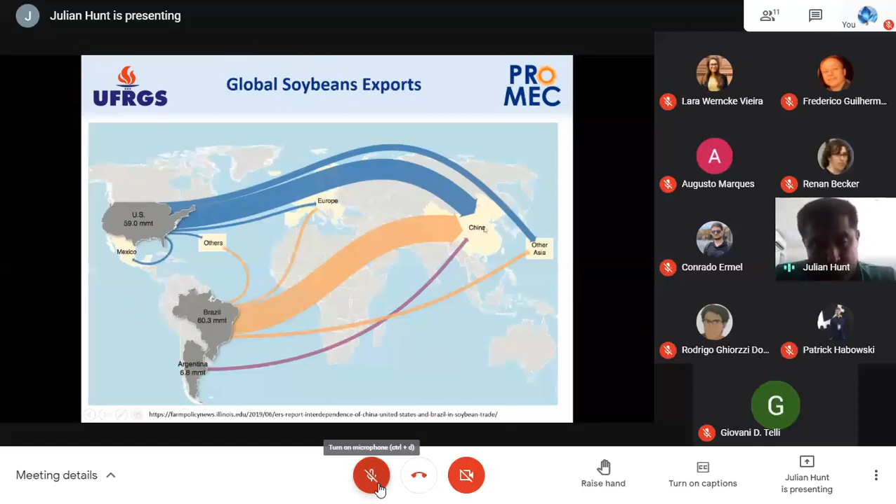Another interesting aspect is that the exportation of soy to China alternates with exportation from the US, because we're in different hemispheres and the harvest happens in different seasons. And biodiesel requires storage, which would also improve this seasonal dynamic, mainly because Brazil will surpass the US, so this synchrony won't happen anymore, and they'll have to increase storage to maintain a continuous flow of soy exports to China.

The benefits of biodiesel: renewable fuel, has less sulfur than normal diesel, creates jobs in the countryside, is biodegradable, so this could be an advantage or disadvantage. It's mainly a disadvantage in my view. It has high lubrication characteristics, so it's good for the motor, keeps it lubricated.

The problem is that, as I mentioned, you have organic degradation, you have microorganisms, crystals formed within the biodiesel. It absorbs water, which reduces the calorific value, which is the problem for storage, mainly for storage.

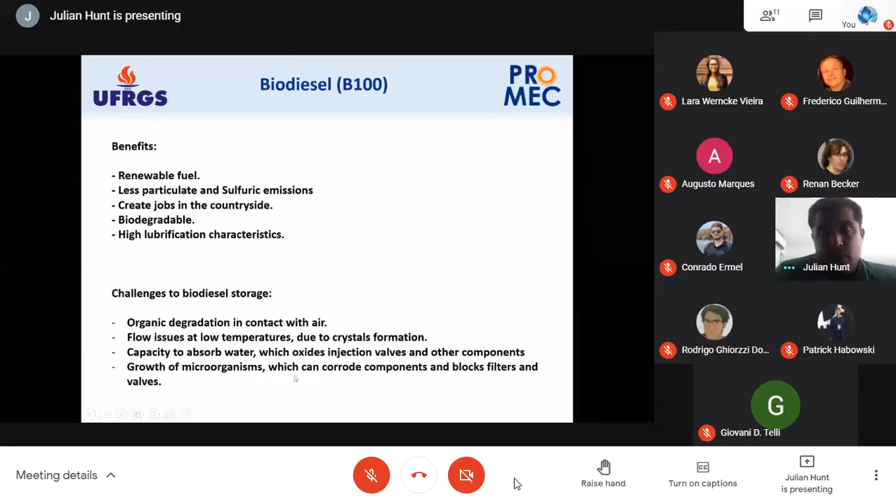Right, so now let's talk about RenovaBio. Any questions about biodiesel? Ethanol?

Okay, so RenovaBio. RenovaBio is a new policy in order to create a market for biofuels with the intent of increasing, subsidizing, so it's creating more money to enhance this market for biofuels with the intention of creating jobs, reducing the CO2 emissions from fossil fuels, and because Brazil has a huge potential for biofuels and biomass, it's a program to increase the viability of these fuels. But the main argument is to reduce CO2 emissions.

So how does it work? The biorefinery, a company that produces biofuels, when it sells the biofuels that it produces, it gets a certificate. So it's the CBio. CBio is a certificate for biofuels. And one certificate is equivalent to the reduction of 1 ton of CO2 to the atmosphere.

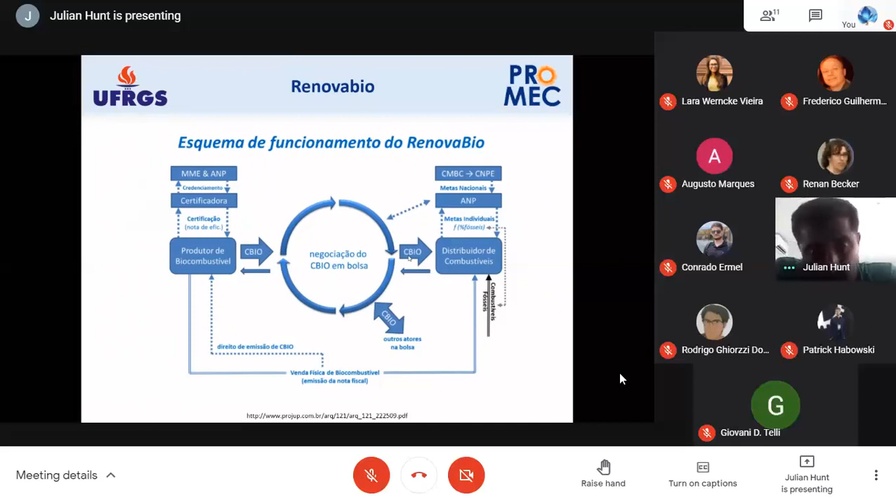Right, so the producer produces ethanol, for example, and when it sells the ethanol to the distributor, it gets the receipt, and then this receipt will go into a calculator that estimates how much of that ethanol sold is equivalent to the reduction of CO2 emissions. And 1 CBIO is equal to the reduction of 1 ton of CO2 emissions. So the more efficient the production of ethanol is, the more certificates it will be able to make with the ethanol it's selling.

There is a market organized by B3, where you can buy and sell these certificates, which is a result of RenovaBio. So we created a carbon market. It's the first carbon market in Brazil. There are several carbon markets in the world. In Europe, you have the clean development mechanism, which is one carbon market, where people that emit a lot of CO2 can buy emissions from other companies. So this is the first carbon market in Brazil, just for Brazil, which is very interesting.

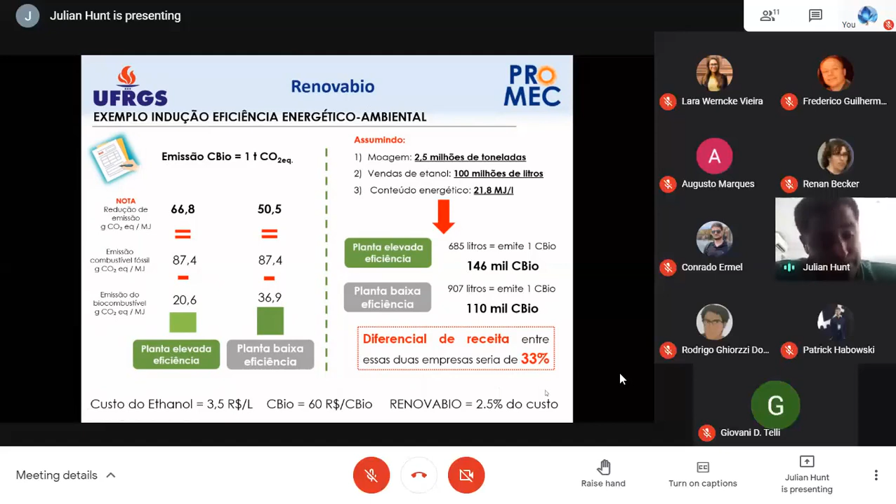So RenovaBio had a bad turnover now because the government decided to reduce the metas, the targets. It reduced in half the targets they had to be met in 2020, mainly because the target was not going to be met due to several reasons.

One is because COVID lowered the price of gasoline, so more people are using gasoline. Also, COVID increased substantially the cost of sugar, so the refineries are producing sugar. We had a bad production of bagasse because it was dry in the locations where they plant sugarcane.

And there were not all the plants that produce biofuels applying for a certificate, because in Brazil a policy only works when a lot of people make money, and it's a substantial investment in order to get certified to get these CBIOs. Only 40 to 50% of the biofuel production facilities have applied for CBIO. The others have not applied yet, so the number of CBIOs did not reach the expected level.

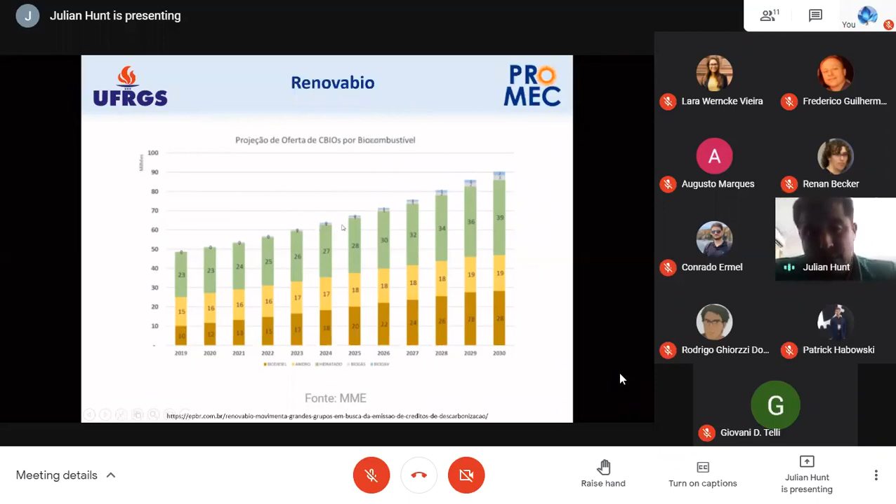And for our lecture, I found this very relevant: the certificate - you can only apply for it 60 days after you're selling the ethanol or biodiesel. And after 60 days, if you don't apply for the CBIOs, you don't get it. It's expired, so you can't get it anymore.

So for example, you can increase your storage capacity and wait for the market to go up or down, depending, for example, on a decision in Congress - waiting for the price to go up and down. For these types of strategies, in order to make more money from your fuel, it might pay off to build extra storage capacity to also make money from CBIO production.

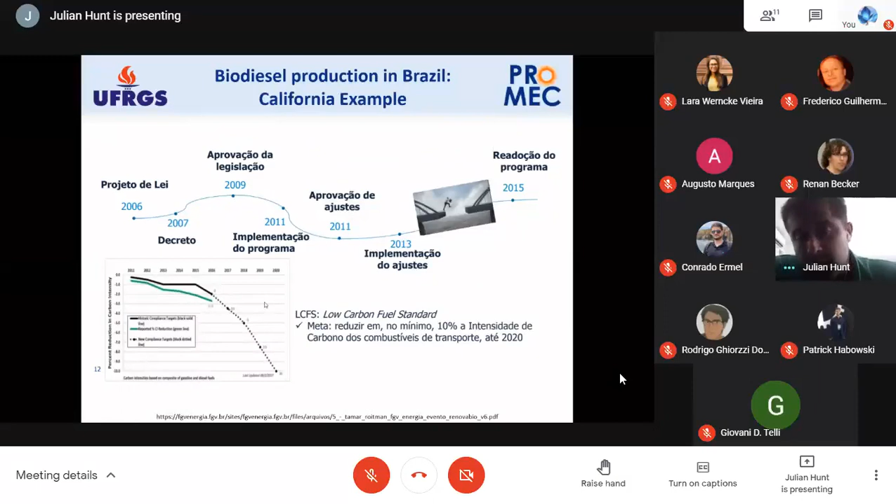This is just an example of another carbon market, in California. There are several different carbon markets with different mechanisms, and this is the first carbon market in Brazil, RenovaBio. Any questions? You guys know about RenovaBio?

Any feedback? I guess we have 2 minutes until the end of the lecture.